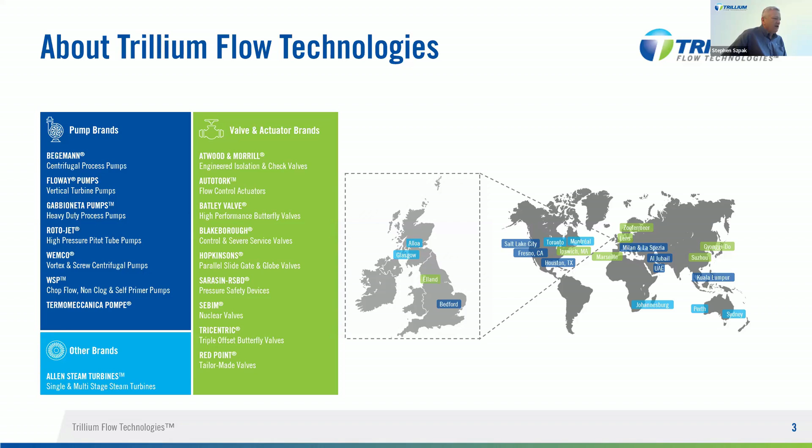Trillium has a global footprint of manufacturing plants and service operations centers. That service is provided across all regions of the world, and Trillium prides itself on providing support throughout the life cycle of the valves. As we'll discuss in some of the coming slides, that life cycle can be pretty extensive, as the Trillium brands are all designed to last the lifetime of the facility and really provide unparalleled service during that time.

So when you look at the Trillium Flow Technologies brands, they have a very long heritage of innovation. You can see it starts out in the early 1800s. In 1828 was the Blakeborough control valve line, so pretty soon that product line will be approaching its 200th anniversary. That's a real testament to the longevity of the products and to the quality of them and what they provide in the marketplace. Even though we've been around for a long time, we really don't rest on those laurels.

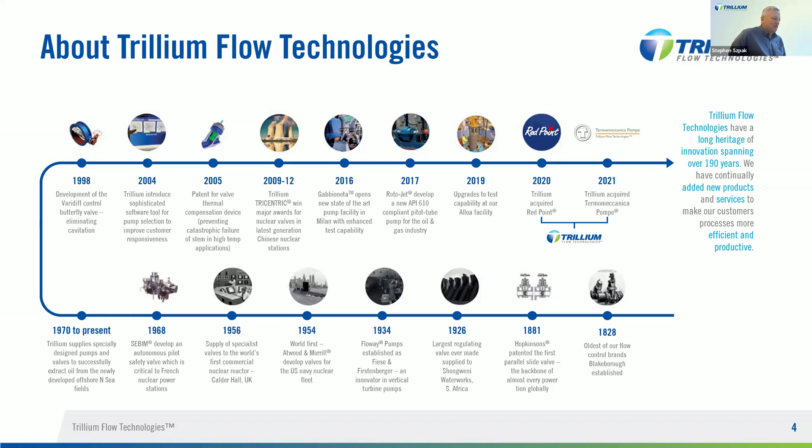We work and are continually innovating in the marketplace to bring new products. The one common thread across all of these products within the Trillium portfolio is they're all highly engineered, high quality equipment. In order to make it into the Trillium brand families, you really have to have a quality product that serves the process flow industry.

So what we'll be talking about today will be the application of this valve, the features and benefits, and the product range and options. I'll take us through the application, Jeff will work on the features and benefits, and then I'll wrap it back up with the product range and options.

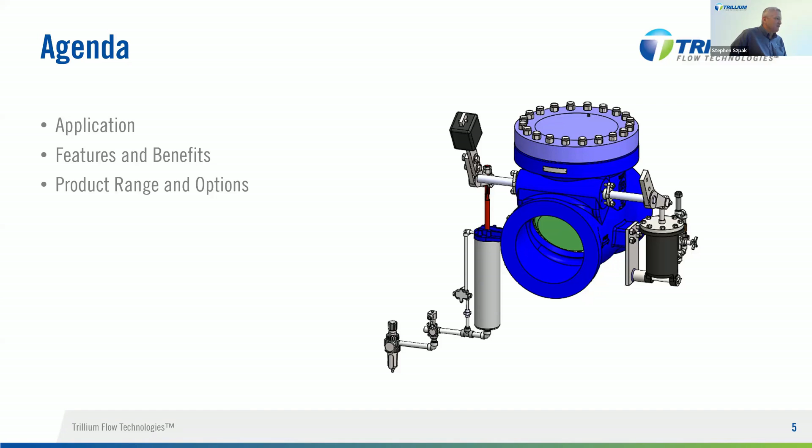As far as the application goes for the Atwood and Morrill Compressor Discharge check valve, this valve is used in refineries, in the oil and gas and petrochem marketplace. There's a number of different applications and systems it can be used in. Some of these are listed on the left-hand side of the screen here: fluid catalytic cracking, propylene, ethylene, ammonia service, syngas, methanol, nitrogen. All of these services, this valve is used in. The one common thing that ties all of these services together is that they have a compressor in their system, and these valves are used to protect that compressor.

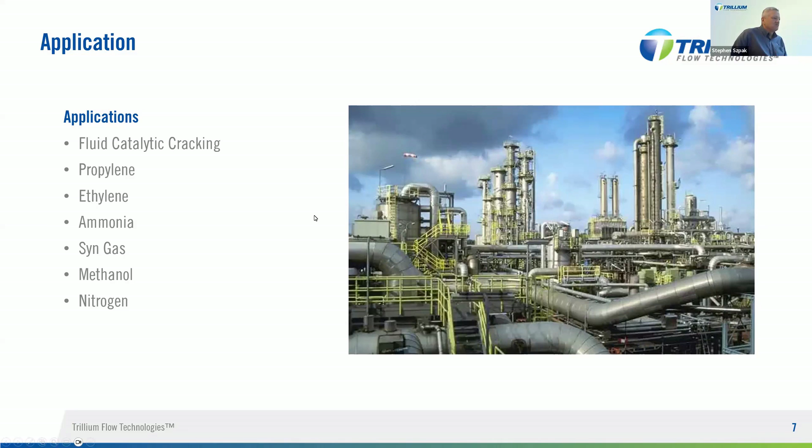So what we'll do here is focus a little bit on fluid catalytic cracking, because this is really where this valve cut its teeth in the oil and gas and petrochem marketplace. UOP, the developer of the first commercial fluid catalytic cracking process unit, actually lists Atwood and Morrill Compressor Discharge check valves in its specification. These valves are listed in that specification under special check valves, and the two applications they call out are the regenerator inlet air special check valve and the main air blower discharge special check valve.

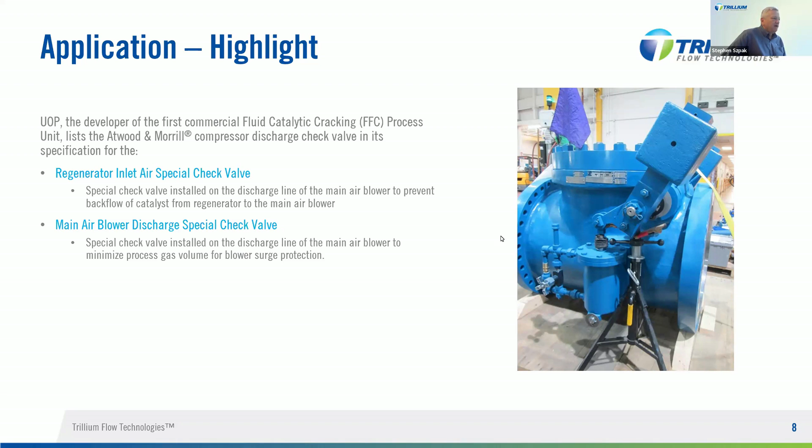So as you can see from both of these applications, the valve is really there to protect that main blower. For the regenerator, a special check valve is installed on the discharge line from the main blower to prevent backflow of the catalyst from the regenerator to the main blower. And in the main blower discharge, its primary function is to minimize the process gas volume for blower surge protection. So this valve is key to the protection of the compressor.

We have a little diagram here that shows the system this valve is located in. On the right-hand side, it shows the air blower and the compressor, usually driven by a motor, or sometimes a steam turbine that can be located actually driving the air blower. The air will flow out of the blower compressor, through the check valve as shown here, and then into the regenerator.

This air into the regenerator is basically introduced so that you can combust the catalyst in there. As the catalyst is cracking the feed fuel in the reactor, it gets a small coating of residue and coke on it. So in the regenerator, you're looking to combust that off. The reactor does its job, you get the catalyst with the residue on it, it flows into the regenerator, you introduce the air, combust it, burn off that coke, and now you've got catalyst that's able to be used again. Then it recycles back into the reactor, and this keeps occurring.

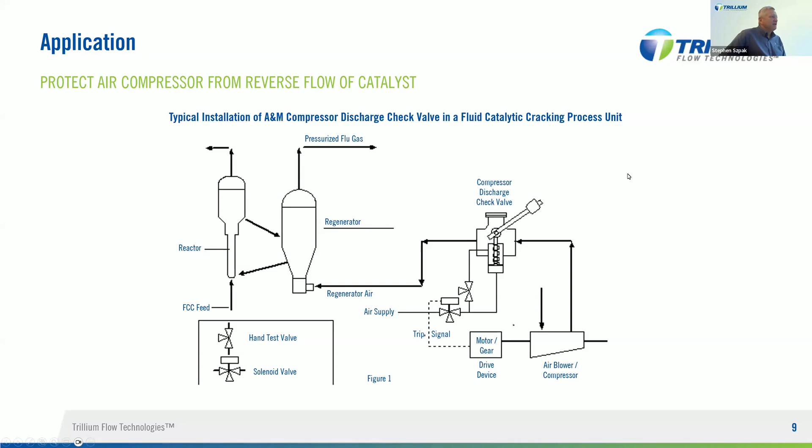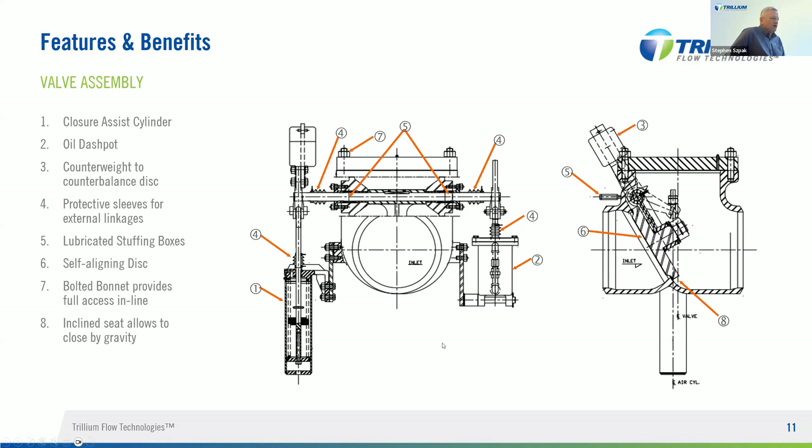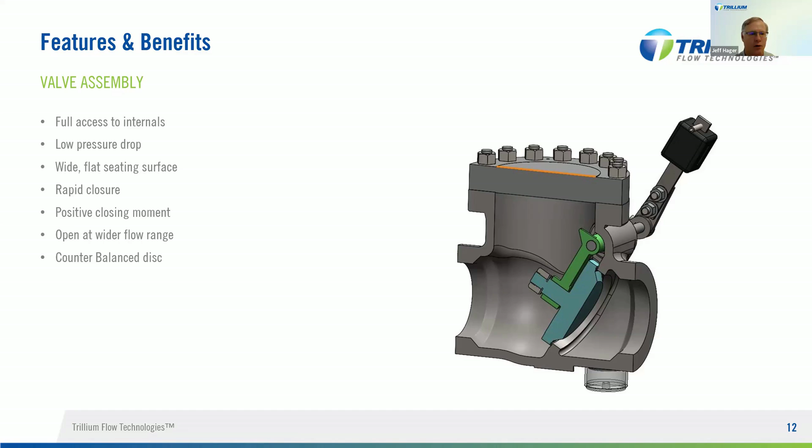Okay, the valve assembly feature benefits are listed on the left: full access for the internals so you can service it if you select a weld-end style valve, low pressure drop, wide flat seats that make maintaining the seats straightforward and also provide a longer leak path should you get a minor scratch, rapid closure with the positive closing moment Steve just talked about, and the counterweighted disc which lets you reach full open earlier as flow increases, due to that counterbalance.

So on the disc assembly, it consists of the disc, the blue item, and the disc arm or hinge, the phantom green item. The self-aligning disc has some free play between the disc and disc arm to enable the disc to find the exact seat. So as you're servicing it over time, if you lap it a little off the original surface, the disc will still find its seat and seal.

When the disc is full open, the disc arm, the green part, has a little fin at the very top that contacts the body rather than the disc, maintaining the integrity of the disc. So if you get any deformation over many, many years, it's not on the disc, it's just on that disc arm stop.

Positive prevention of the disc and arm separation. The disc is connected to the disc arm by trapping it with that nut and washer. The nut is then cross pinned and that pin is peened. So in order to separate these two parts, you actually have to take it out of the assembly to separate it, which gives that extra protection against dropping parts inside the valve.

And the disc cannot spin or rotate due to those anti-rotation lugs on the backside of the disc that entrap the disc arm. If the disc was to spin, you could have higher wear and also wear the disc post to the point where it was weakened. So these features make the valve very robust and extend its life in the plant.

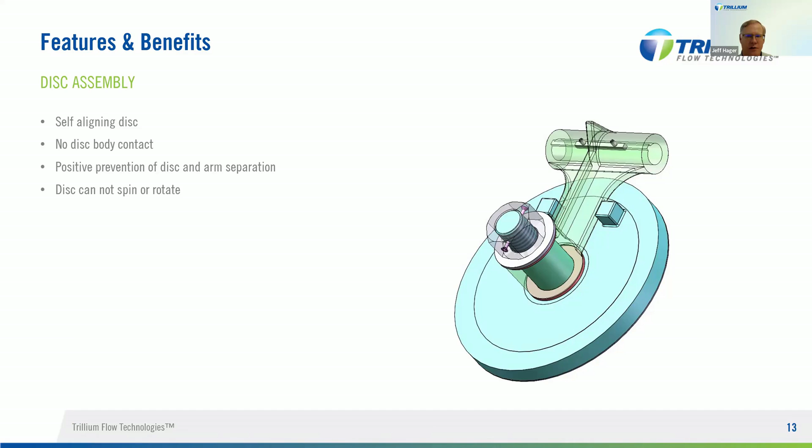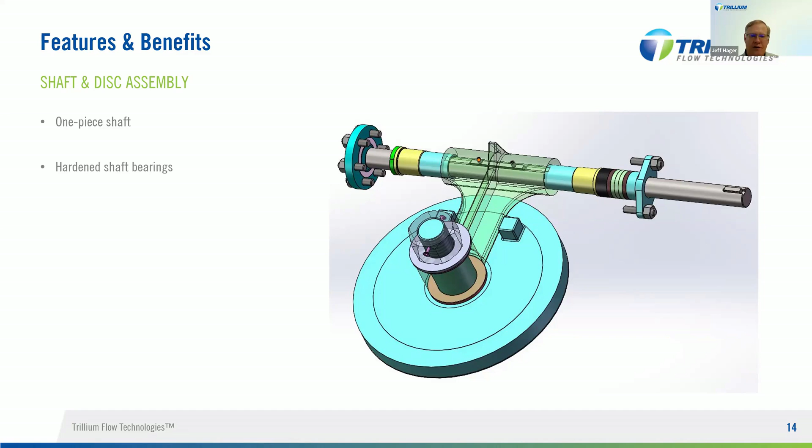So this is showing the disc and arm assembly with the shaft. The shaft is a one-piece shaft to avoid any problems that some of the industry has experienced with two-piece shafts. And then hardened shaft bearings provide, again, long service wear over time.

Here's the power assist cylinder. The parts are detailed on the left. I'll point out the piston rod has a spherical nut and lock nut at the top. This is what engages with the lever arm, which has a fork. The fork straddles the piston rod, and this spherical nut contacts it when it's going in the down direction, but it's not connected.

That enables you to pressurize the air cylinder; the piston rod will move up out of the way, permitting the valve to free swing, but it will not force the disc into the open position. We'll talk more about that in a minute.

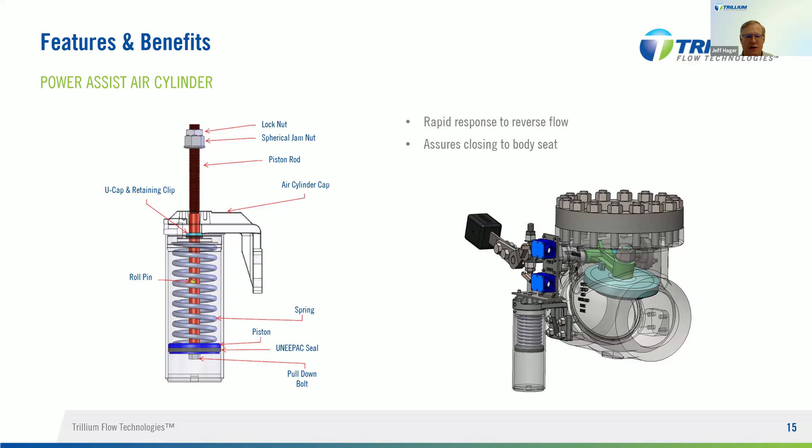And this enables the air cylinder to have a rapid response to reverse flow conditions and ensures that the disc is moved all the way to the body seat when the flow is stopped.

So here the air cylinder is shown in the de-energized condition, so that spring approaches its relaxed condition, pushing the piston down, pulling the piston rod down, and the spherical nut pulls down on that lever arm fork you can see in the picture. The lower switch will be tripped if there's no forward flow.

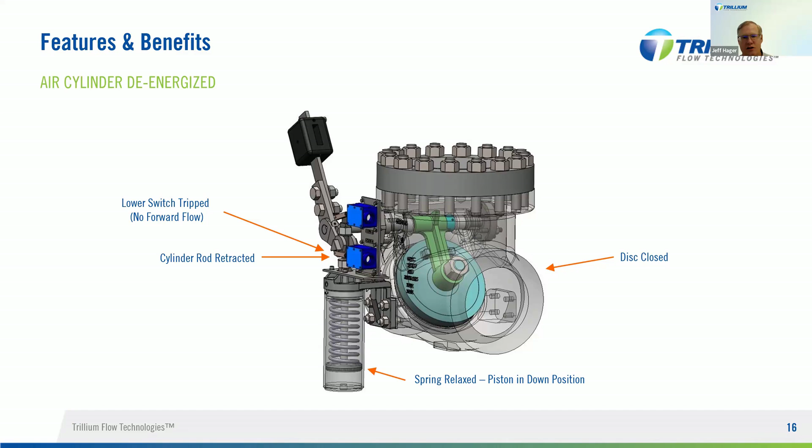If you still have forward flow, the spring is not sized to close against forward flow. Its intent is to be a number of times stronger than the expected packing friction after the packing is exposed to the flow conditions over a long period of time. It breaks that packing friction and encourages the disc to the seat as the flow decreases.

Next slide. So this is shown with the air cylinder pressurized, which compresses the spring, moving the piston and the piston rod up. The extended piston rod enables the valve to free swing to the open position when sufficient flow is present.

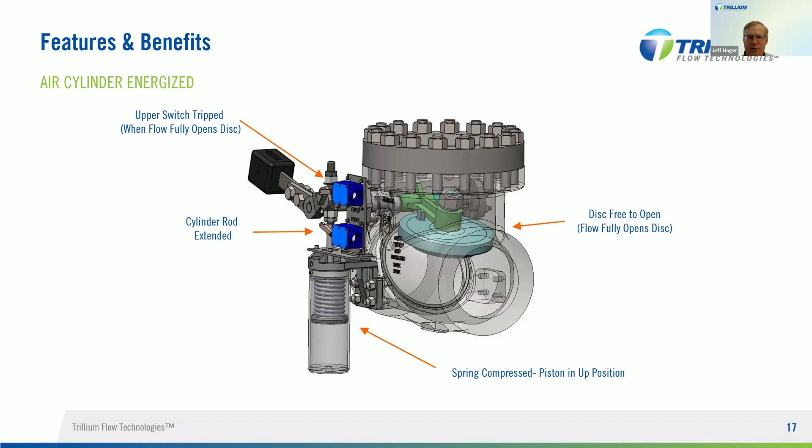And so that upper switch will be tripped when the flow drives the disc to the open position. If your flow is only sufficient to move the disc off the seat, but not fully open, the lower switch will untrip and the upper switch will not be tripped yet. So you'll have an indication that it's somewhere in between. And we have a solution we'll talk about in a little bit if you want to know really exactly where the disc is.

So here's a picture of the fabricated version of this valve. Up to about 48 inches, we'll typically use a cast body. Once you get over that, the body transitions into this fabricated version. It can be provided as flanged or weld-in version, but it still maintains the bolted bonnet, full access to the internals, and all the other features and benefits that we've talked about.

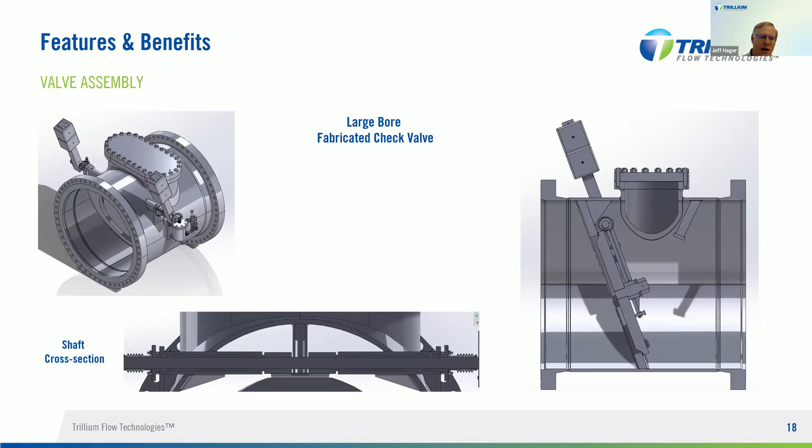The disc in this particular case is stopped by a fabricated stop that's to the right of the cover area, and it will contact the disc post when the valve is in the full open position. And there's also a cross-section view of the shaft showing the disc arm and bushings and packing and protective sleeves on the shaft.

Here's the oil dash pot. So the dash pot piston rod has a bellows that protects the interface to the guide in the cover from dirt and debris.

The piston itself does not have any seals, so as you open and close the valve, oil flows around a small clearance between the cylinder and the piston, and the piston, as it moves back and forth, will pump the oil through this loop. So there's a needle valve in the first loop where you can adjust your dampening, and there's a relief valve in the second loop that provides protection in case you have the damping adjusted way down and you get a sudden slam as the piston tries to pump the oil through that needle valve.

If the needle valve isn't open enough for the speed with which you're closing, that relief valve will open and let the oil go through so that your valve will still go quickly to the seat.

And there's a cap and a vent to accommodate temperature changes. In the case of overfilling, it will enable you to eject some of that oil if you've overfilled it.

On the right-hand side, you see the piston rod is directly connected to that fork, unlike the air cylinder side, which is not connected. This provides damping through the whole stroke.

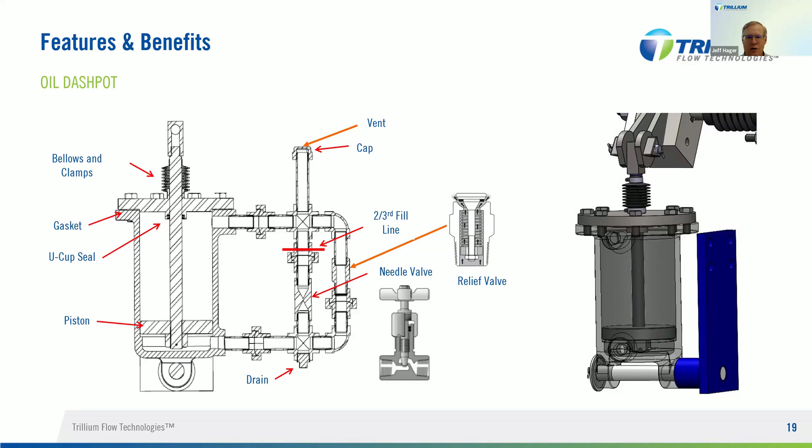The mounting bracket and pivot pin enable the dash pot to rotate a couple degrees either direction. As that lever arm strokes open and closed, it follows a circular path so that you need a degree of freedom there for the dash pot to stay aligned with the fork.

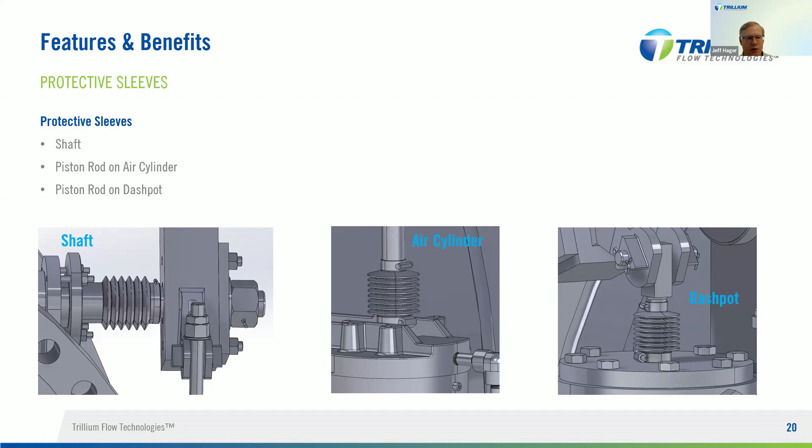This bellows is provided as a rubberized fabric, so it is subject to decay over time. It's a good idea to keep an eye on them, and as the rubberized fabric becomes brittle, replace them so you don't lose your protection against debris.

Here's a view of the lubricated stuffing box. The lantern gland on the left is in the center of two packing sets, and the injector goes through a hole in the body that you permanently mount this injector to the valve.

As you inject the packing grease through, it goes through this little ball valve and spring to inject it into the stuffing box. That ball valve enables you to pressurize the valve, and the pressure does not get past that ball into where the injector bolt is.

You also can see on the right, there's a packing gland that compresses the packing, live loaded springs that enable you to maintain the packing load over time as the packing wears, and then the bellows, which provides that protection against debris.

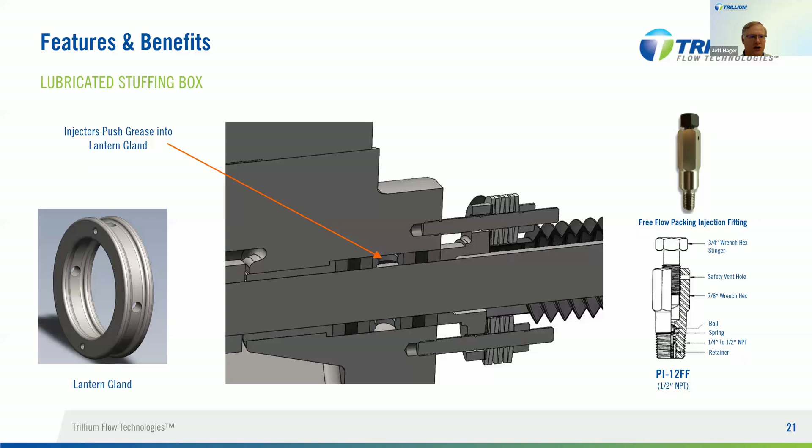Okay, so we've gone through the features and benefits. So what we'll do here is we'll talk about the product range and options, and then we'll review the features and benefits to close up this presentation.

So sizes, the typical sizes that you find these valves in are 8-inch through 72-inch, but we can go larger than the 72-inch. That's the typical size range that you would see these valves in.

One thing to note is on the lower end, so below an 8-inch valve, we really don't call that out, although we do have a design for that. Some of the concern gets around when you get into the smaller sizes is the weight of the disc.

So the disc in that valve, you always want the default of this valve to be the one to close. So the concern gets as you get lighter disc in there, and because you have to have the shaft penetrate on both sides of the valve, one side for the air cylinder and the other side for the oil dash pot, you have a lot of packing friction in there.

And the concern with the 6-inch and smaller sizes is that packing friction could cause that valve not to close. The disc won't have enough weight to overcome that packing friction. So there's a concern that the response time will be slow on that.

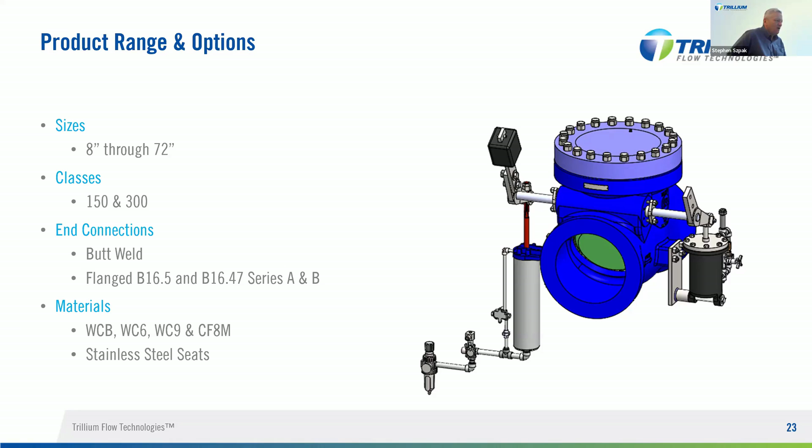We can do LCB when we get into the low temperature valves. The normal seat on these valves is stainless steel. That seating surface has been used since the beginning with this valve, going back 60, 70 years plus. Those seating surfaces hold up very well under the operating conditions you'd see in these units, and because they're a wide flat seat, the impact stresses are taken up by those, so they tend to last a long time.

So the stainless steel seats are perfectly fine for this. However, if you have an application where you'd prefer to use hard face number 21 seating surfaces, we can absolutely do that. It's just a little bit more cost-wise, but it is something we can do. But really, when you look at it, the stainless steel seats should handle any of the services that you have.

We also have a test valve for the air cylinder piping. This test valve is in there to allow you to test that air cylinder. The real function of that is to make sure the air cylinder is ready to work and perform its function on this valve, and also to make sure the valve is in operating condition.

So basically, when you trip either a hand test valve or a solenoid test valve, it will equalize the air pressure on either side of the cylinder. The spring force will take over, and it will start to move that piston rod into the retracted direction. That will contact the lever arm, as you can see on the right-hand picture here, and it will start to pull that lever arm down. What you're looking for when you exercise that is just the piston rod to move a little bit and see that the shaft is free to rotate.

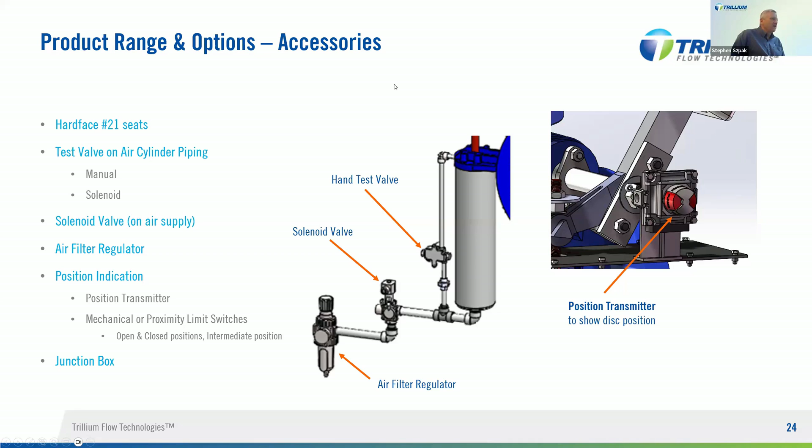We'll just wrap up here by reviewing the advantages of our valve design, and then we'll stick around and take any kind of questions that you may have on the valve.

One of the key advantages of our valve is it's a proven swing disc design. The swing disc design has been around, I think, for as long as valves have been around. So it's a very simple, very reliable design. And reliable is the key word here, because when we get into the closure assist air cylinder on this valve, that's providing additional reliability. So you're taking a valve that's inherently reliable and adding on that closure assist that's giving you a little extra reliability to make sure that valve is going to start to close, breaking any kind of packing friction. So you get the idea.

It's all about reliability to make sure that this valve is going to close when you absolutely need it to, protecting your expensive piece of equipment and preventing downtime that's going to cost a lot of money in getting the unit back up and running.

We have the wide flat seats that we've been talking about. Very good for giving you a tight shutoff. They're a very forgiving seat because it takes a long path for a leak to start through one of these, as opposed to a line contact seat. And as opposed to a tilting disc valve, which could possibly become wedged in the seats, this valve cannot be wedged. So that's where you get the non-jamming feature.

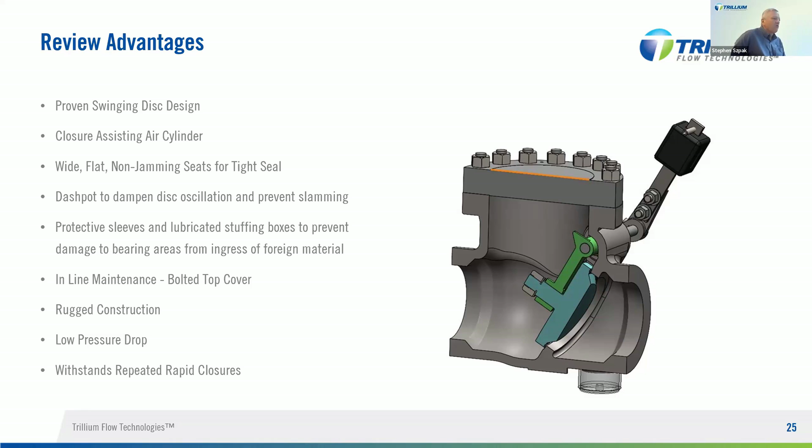Tying in with that rugged construction and the seat angle, this valve is designed to withstand repeat rapid closures. So if you get a reversal of flow, that closure is going to be extremely fast in the valve, which you want it to be. But this valve is designed in such a way that it is going to hold up to that reversal of flow and provide you with long life. So that kind of wraps up the valve itself.

When we talked earlier about the global footprint of Trillium Flow Technologies, it's important to note that this valve can be manufactured in any of our locations on a worldwide basis. So if you need some local content, or more importantly, if you have this installed in another location, chances are there's a factory that's regionally located that's going to be able to help you out with this valve. That's something that really sets us apart from a lot of the manufacturers out there.

So that wraps up our presentation here on the Atwood Morrill Compressor Discharge check valve. We would certainly be happy to take any questions that you may have about this valve, or questions about valves in general. We'll try to help out there. It's always fun, we can play stump Jeff Hager on this with your valve questions.